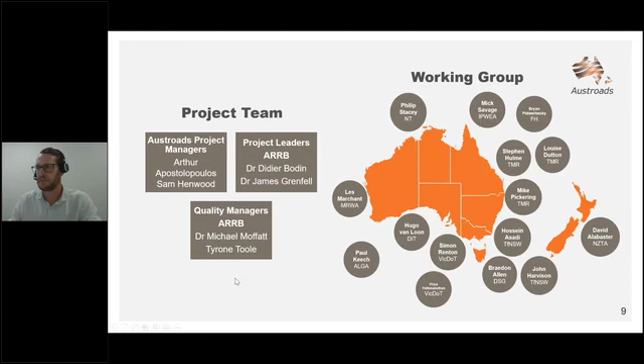So to put this in a bit of context, why do we need to look at glass? So in March 2020, COAG agreed the Australian government to regulate the export of glass and plastic and other recycled materials such as tyres and paper.

And the Transport and Infrastructure Council, TIC, noted the opportunity for transport infrastructure projects to repurpose some of this waste. So to support the COAG waste export ban and the National Waste Action Plan, Austroads commenced a programme of work to develop guidelines and specifications on the use of crushed glass in road construction by the end of 2021.

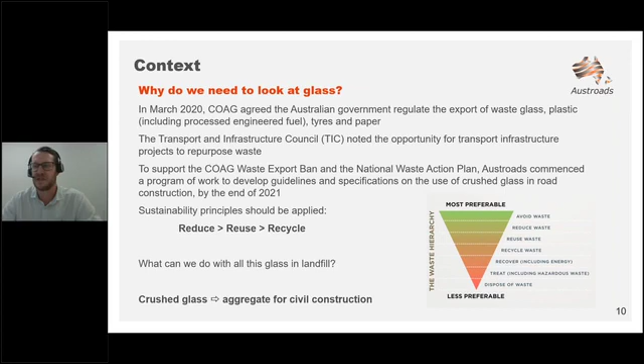As is the case with all projects, we should respect sustainability principles, and this involves reduction of the amount of waste that we're generating, reusing waste in its original intended use where possible, and where not possible, recycling the waste. So what can we do with all this glass that ends up in landfill? The purpose of this project is to look at whether we can use crushed glass as an aggregate for civil construction.

Now moving on to the project objective. The main project objectives are to increase the use of crushed glass in road infrastructure. This has been done through the development of an Austroads technical specification to assist road agencies and local governments to use more recycled materials in their road construction activities.

In support of this document, a technical report was also developed to give the underpinning knowledge on the limits and also the reasoning behind the technical specification. Also produced was a processing guidelines document.

This work was funded through an Infrastructure and Transport Senior Officials Committee project, and as mentioned by Katarina, sits as part of the Austroads Transport Infrastructure Programme under Ross Guppy.

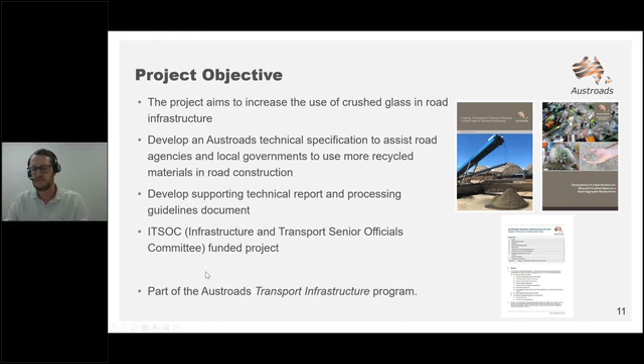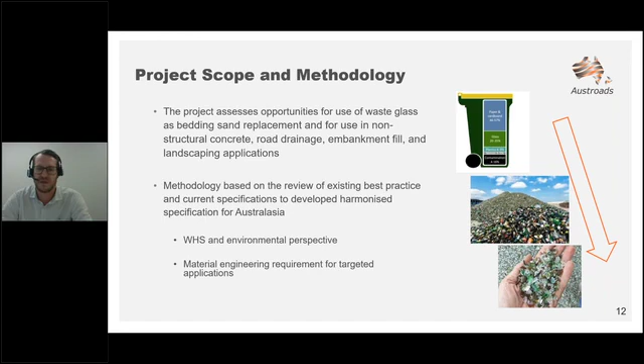Now to talk through the project scope and methodology. In terms of scope, the project assesses opportunities for the use of waste glass as a bedding sand replacement, and also for use in non-structural concrete and pavement applications, road drainage applications, embankment fill, and landscaping applications. The methodology involved reviewing existing best practice and current specifications to help develop a harmonized specification for Australasia. This work has taken into account work health and safety and environmental perspectives, and also considers the material engineering requirements for the targeted applications.

Dumping in earthworks potentially may have limited value, and we should be aiming at upcycling recycled resources where possible. Another note was that the economic benefit is very dependent on transport costs. There were question marks about certainty of supply, and that's something definitely to be thought about.

If we're using recycled crushed glass in a large number of projects, potentially we could end up using up all available stockpiles. Another thing that was noted was that the material can be more difficult to work with, especially in terms of things like odor, and it can be heavy when wet, and even more expensive when washed. We also need to be thinking about education for our engineers rather than mandating its use.

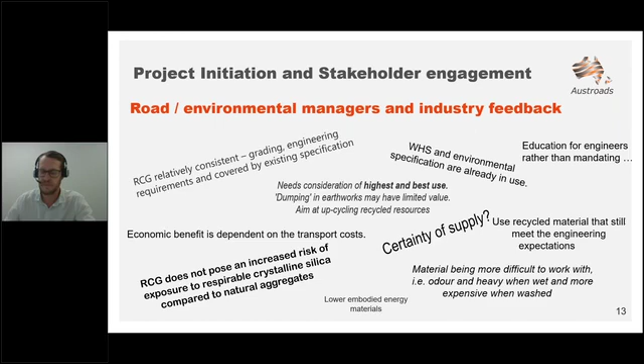I'm Didier Bodin, Principal Technology Leader at ARRB, and I will take you through the key findings of the technical report APT 362, which was published recently, which summarizes the technical basis of the development of the ATS 3050, which covers the supply of recycled crushed glass for transport infrastructure. I will present the important outcomes and put them in perspective of current practice. After that, James will be diving into more detail about the specification requirements.

As introduced earlier, the aggregate we are dealing with is derived from curbside recycling, commingled or separated, collection of glass. If they aren't recycled as glass containers, they can be recycled as aggregate, and for that they are crushed to produce a consistent grading material.

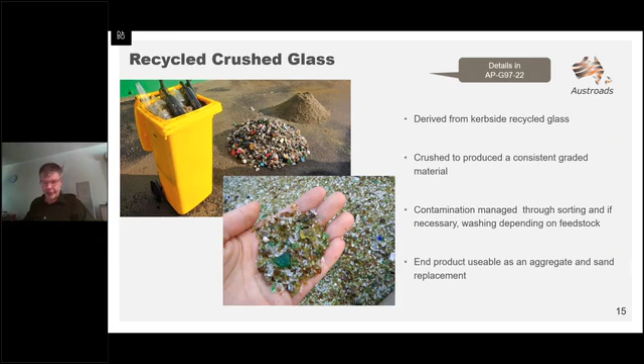The contamination level of this type of material can be managed through sorting and, if necessary, washing, depending on the feedstock and how uniform or contaminated it is. In general terms, the end product is usable as an aggregate or sand replacement in civil applications.

We went through an assessment of the environmental risks of using this type of aggregate in road infrastructure. It has a strong basis from past research and past regulation around the use of this material in this type of application. In particular, the EPA requirement set in 2014, which has been further adopted by TMR, Transport and Main Roads in Queensland, in the development of the MRTS 36, set the basis for us to harmonize the requirements for Australasia through this specification.

It basically contains three types of requirements.

The first set of requirements are on the metal contents, which include mercury, cadmium, lead, arsenic, chromium, copper, molybdenum, nickel and zinc. Also an assessment of the total organic carbon, an indication of organic matter contaminants, and an indirect assessment of any dissolved minerals which can be contaminating the aggregate through electrical conductivity.

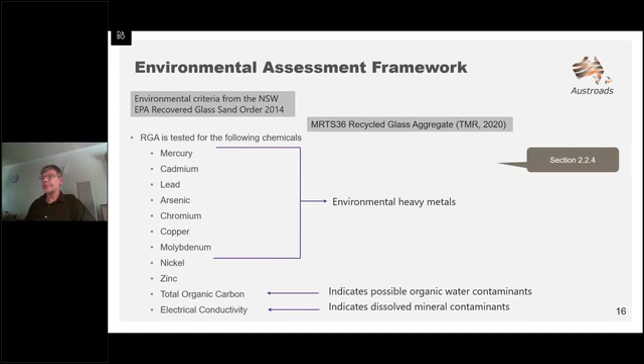So the methodology was based on benchmarking the current requirements through different agencies, from EPAs or other agencies, to set the limits which would be adopted nationally, including New Zealand, for the recycled crushed glass.

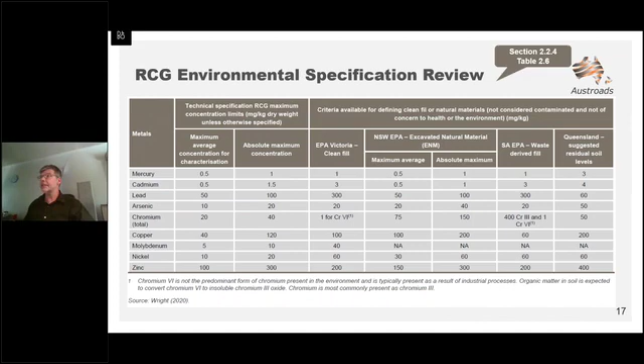As I said, the requirements set by the New South Wales EPA were key in setting this limit. They were the most stringent in most of the cases, and they basically included maximum average values and absolute maximum values, which shouldn't be measured on any sample from the stockpiles. Maximum averages are managed through sampling conditions detailed also in the specification.

It was important as well to summarize the current best practice with respect to work and safety risks and mitigation measures to protect the workers and more broadly the communities. Foundation work from the Winder report undertook a risk assessment and drafted an MSDS for recycled crushed glass for the transport infrastructure. This work was later supplemented by other studies.

An important aspect is that recycled crushed glass, unlike pure silica, doesn't pose an increased risk of exposure to respirable crystalline silica, because the glass from waste containers and bottles, etc., is made mostly from amorphous silica, which doesn't present the same harm and the same risk with respect to silicosis.

As with any aggregate, the risk of abrasion by direct contact is manageable through the use of standard PPEs, goggles, gloves, wearing long sleeves, etc.

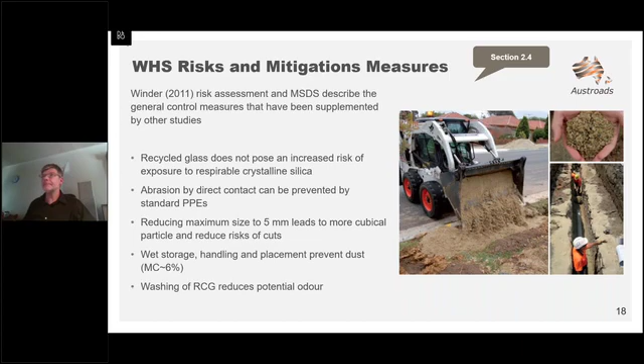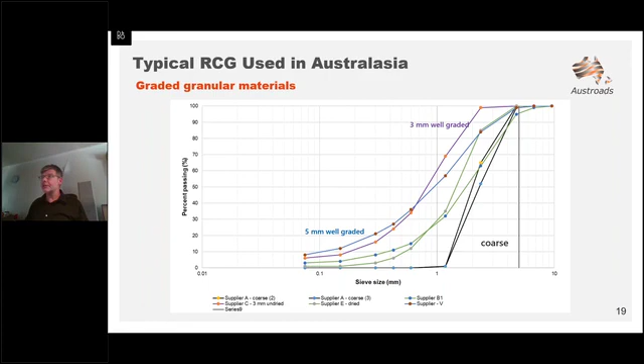Now we'll have a look at what the technical requirements are found to be. So we undertook a review of national and international practice, and it's not new technology, and we summarize the main characteristics, physical properties, which can be found in the literature in terms of particle size distribution, shape, and bearing capacity.

The plasticity of the material - for recycled crushed glass is a particularly non-plastic material, because if it's not contaminated, it has no plastic fines in it.

We summarize data available in terms of compactability, permeability, bearing capacity, and also typical values found for electrical conductivity. We have mentioned before that it can be varying, and it can also be a measure of mineral content. For electric applications as well, which was a bit beyond the scope of this project, the thermal conductivity can be an important factor to dissipate the heat from the electrical conduit.

But it's definitely out of the scope of this specification for high tension, high voltage applications, and some specific specifications for most grids, for instance, ban the use for high voltage electric lines, buried electric lines. In summary, we found that compacted RCG had comparable properties to natural sand products, and there was no reason, as demonstrated by a number of trials, not to use it as a replacement for sand or incorporated in any granular materials.

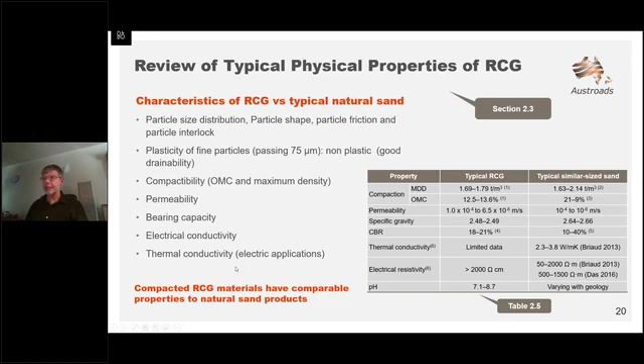What really matters when we are talking about a 100% recycled crushed glass product is the bearing capacity of the material, or its stability with time. This is mostly obtained through its grading, the particle size distribution, and how the material will reach maximum density. It's generally achieved with a well-graded material, which has the highest density result.

That has been used, and it's the typical grading we have, for instance, in the requirements of the specification for recycled crushed glass used as a bedding sand.

However, when it comes to drainage application, there's another function we're after with these materials. We are targeting more space between the particles to let the water flow, and not to build up suction too much through the aggregate packing. Therefore, in that instance, we will be targeting some gap-graded or single-size type of grading curves for drainage application.

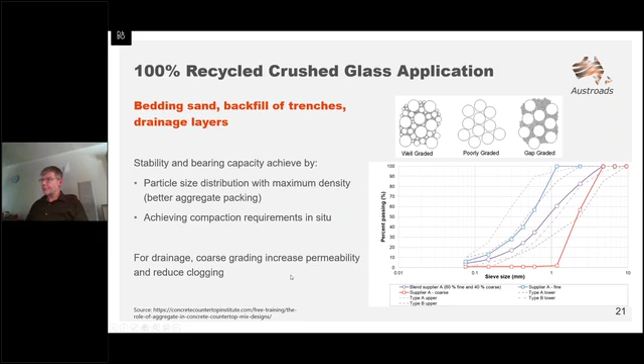Just to mention that some products I showed earlier don't necessarily meet the requirements of continuously graded material, but it's easy to recombine them. For instance, we have a coarse product and one passing 3 mil, two different products with a 40-60% blend. You end up with a product which is a well-graded material, so it can be tuned to the desired target gradings.

But also, recycled crushed glass can be used not only at 100%, but it can be added to a range of granular materials, primarily crushed rock, for road bases and road subbase. The specification in different jurisdictions varies from a 5 to 50% allowance, depending on the material type or the performance requirements in terms of traffic loading, or if it's a highly stressed layer.

It can be used as well as a constituent in concrete mixtures, and the scope of this work was mostly focused on non-structural concrete or concrete pavement. It can also be an additive in asphalt mixtures. It becomes part of the mix design, and there are some maximum requirements which can help manage potential risk of stripping.

And it's totally suitable, of course, to be added in terms of earthworks, embankment, and landscape application. But we have to bear in mind that we want to maximize and upcycle the use of this material, and it might not be the best end use of this material.

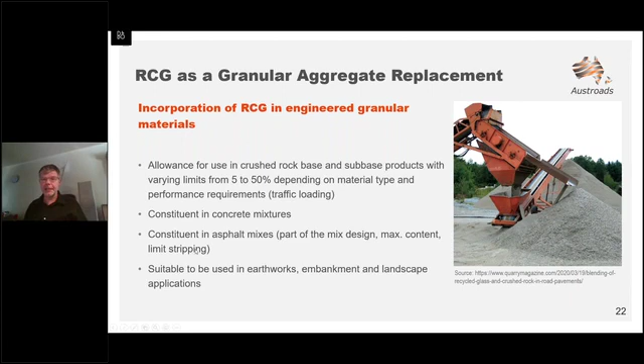And now I'm going to be moving on to talk about the Austroads technical specification. So this has obviously been developed as part of the project.

Just to go into an introduction to the development of the specification, this has been supported by decades of research, and field trials and implementation have paved the way. This dates back to things like the Packaging Stewardship Forum initiatives back in 2006, specifications for recycled crushed glass as an engineering material developed by Bob Andrews back in 2010, and trials of recycled glass as a pipe embedment material undertaken by the Department of Environment and Climate Change back in 2007.

As Didier mentioned before, the Department of Transport and Main Roads Queensland's MRTS 36 specification has been instrumental in the development of the specification. And also, obviously, we've been looking at what's been done overseas. So when glass hasn't been reused, i.e. converted back into glass containers, similar technical uses have been found overseas. Specifications for natural aggregates tend to set the minimum requirement for recycled crushed glass when used as a glass sand, and this has led to the development of a harmonized requirement for recycled crushed glass.

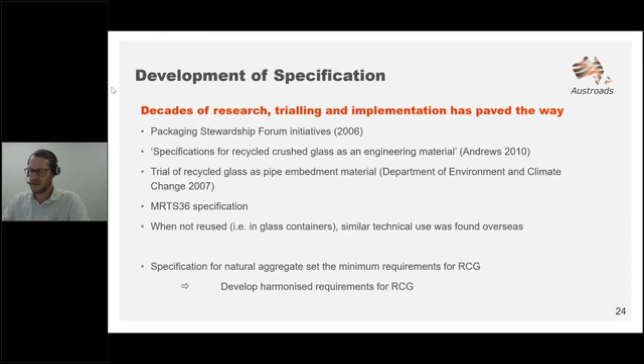Now I'm just going to talk through the structure of the developed specification. In terms of contents, it contains some information about the scope where the specification is applicable, provides a number of definitions of key phrases within the specification, goes on to list a number of reference documents, and then talks about the quality system requirements before going into some of the key aspects.

So the key aspects are things like the glass source, the chemical and other material requirements, its properties for use when used as a granular material, and then some of its properties when used in concrete, including some general requirements, and then it touches on the alkali silica reactivity.

Finally, there's some information about testing and conformance, so how often materials need to be tested, and what amounts or lots are needed to be tested to meet that conformance. And then it goes into some annexes that cover hold points and witness points and records.

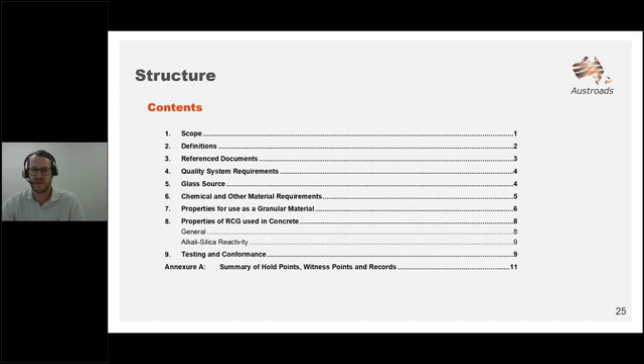So first of all, if we talk about the glass source, there's some key requirements in terms of the sources of recycled crushed glass and the contamination limits. Recycled crushed glass must be produced from food and beverage container glass or window glass, meaning the source material must be essentially free from glass from certain sources, including cathode ray tubes, fluorescent and incandescent lights, glass recovered from electrical equipment, glass recovered from laboratory sources, porcelain products and cook tops, and glass from hazardous waste containers.

This is one of the reasons to reduce the amount of contamination that could be in the resultant recycled crushed glass. Recycled crushed glass should be free from contaminants, and some maximum average concentrations are reported in Table 5.3, shown on the right-hand side of this slide.

There are limits for certain contaminants including metal and ceramics, with average maximum concentrations of 0.25% for metal and ceramics, with an absolute maximum concentration of 0.5% in any particular measured sample. This is similar for brick, plaster, clay lumps, and other friable materials. There's also a set of limits for contaminants such as rubber, plastic, bitumen, paper, cloth, paint, cork, wood, organic matter, and other deleterious materials, with a maximum allowable average concentration of 0.3% or an absolute maximum concentration of 0.5%.

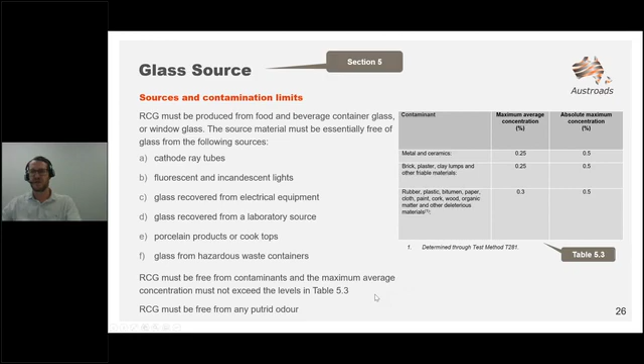These contaminants can be measured through Transport for New South Wales test method T281, which is a loss on ignition test. Also, the recycled crushed glass must be free from any putrid odor.

Now moving on to chemical and other material requirements. This is reiterating some of the information that Didier talked about from the technical report. In the specification, there are limits on chemical concentrations of certain metal contents, including mercury, cadmium, lead, arsenic, chromium, copper, molybdenum, nickel, and zinc, with maximum average concentration limits across a set of samples, typically 5 historic samples over time, but with some absolute maximum concentrations for any singular test.

There are also some limits on the total organic compound, organic carbon content, looking at organic water contaminants. There are also requirements in terms of electrical conductivity, which relates back to contamination levels of dissolved minerals. This table is within the specification and needs to be followed to understand what the chemical and other material requirements are.

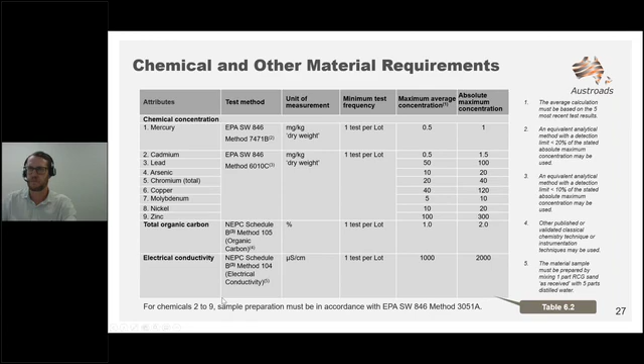The next thing is the properties for recycled crushed glass for use in granular materials, and there are quite specific grading requirements. Didier went through the background in the technical report as to why gradation is important for some applications. There are also some general notes about the recycled crushed glass particles - they should be cubic in shape and free from sharp edges and elongated particles. Their particle size distribution should be determined in accordance with AS 1141.11.1, but depending on the end application, each potential application has been designated a grading classification type.

As part of this work, we looked at a number of different end applications for recycled crushed glass, including bedding and haunch of drainage pipes and conduits and services, and also side zone and backfill of drainage trenches, which requires a Type A grading. It could also be used in bedding for segmental or block paving, requiring a Type B grading. It can also be used in joint filling, filling voids between individual segmental blocks or block pavers, requiring a slightly finer Type C grading.

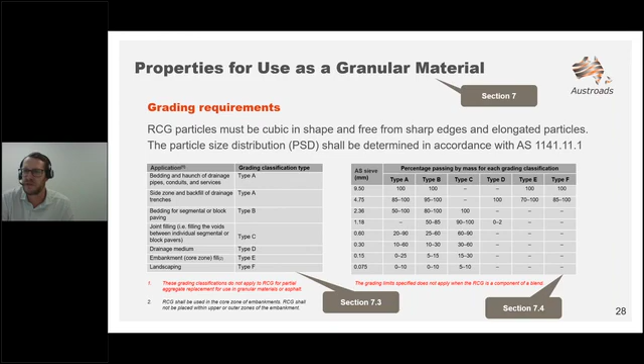Type D, which is for drainage medium, is controlling the glass particle size in terms of almost making a single-sized product, so still passing 4.75 millimeters, but pretty much everything retained on a 1.18 millimeter sieve to remove all the fines to allow it to be free draining. And there's much lower restrictions in terms of embankment fill and landscaping applications.

There are also a number of properties when recycled crushed glass is to be used in concrete, and these are very specific. A lot of this is to do with preventing certain deleterious reactions that can occur with certain contaminants when recycled crushed glass or specific aggregates are incorporated into concrete.

So things that we need to be mindful of are things like sugar in the aggregate, sulfate content, chloride content. There's also some requirements for methylene blue absorption values, which relates to clay content.

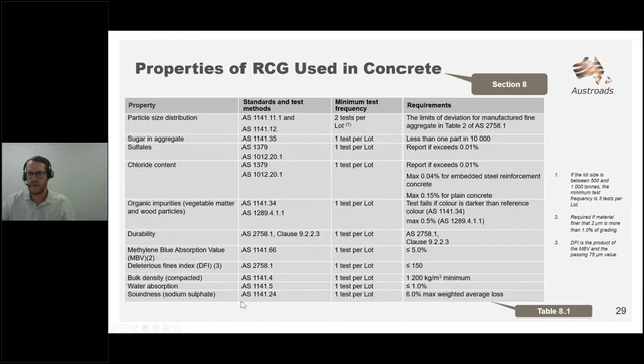As mentioned, the alkali-silica reactivity is a major challenge. We want to prevent that alkali-silica reaction from occurring in concrete when recycled crushed glass is used as a fine sand replacement. Alkali-silica reaction is known as concrete cancer and causes silica to react with the alkali in the concrete. This can create microcracking within the resultant concrete, leading to strength losses.

So the alkali-silica reaction potential in concrete can be determined through the composition of the recycled crushed glass. RCG is identified as having a potential problem if it's tested in accordance with either AS1141.60.1 or AS1141.60.2, which are methods for sampling and testing aggregates' potential to alkali silica reactivity, either the accelerated mortar bar method or the concrete prism method.

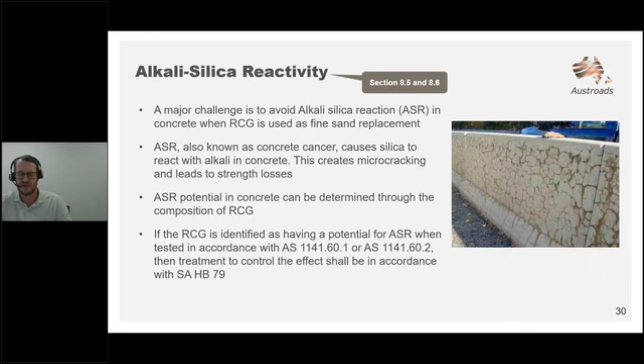And if the RCG is identified as having a potential ASR problem, there is also some advice out there for treatment control, and that treatment control should be carried out in accordance with SA HB 79, which is relating to alkali aggregate reaction, and guidelines on minimizing the risk of damage to concrete structures in Australia.

Now I'm just going to touch upon some of the contents of the guidelines document. We don't have too much time, so I won't go into too much detail. But essentially, the guidelines document provides some general information about how glass should be processed to meet the requirements of the RCG specification.

And if we consider processing of glass, we can be looking at fairly basic processes through to very complex processes. At the more basic level, we could just be including some primary crushing and then a certain amount of processing in terms of removing contaminants. But in more complex systems, we could end up with a number of crushing stages to meet very specific grading requirements, and it could also include some washing requirements, which can be more applicable to certain applications, as we'll touch on later.

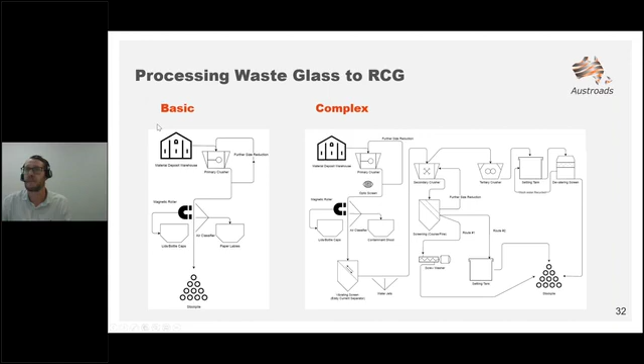So in terms of crushing, it can involve a number of steps, but typically we can meet the requirements with one step, and an impact crusher is potentially the best way to do this. It tends to produce a more uniform particle shape, which is generally cubical in nature.

It produces more fines, which can be advantageous for certain industries, especially hot asphalt producers. It can incorporate a number of interchangeable sieves, which allows us to have more control over the end particle gradation. And also, damaged hammers can be quickly replaced in this type of device.

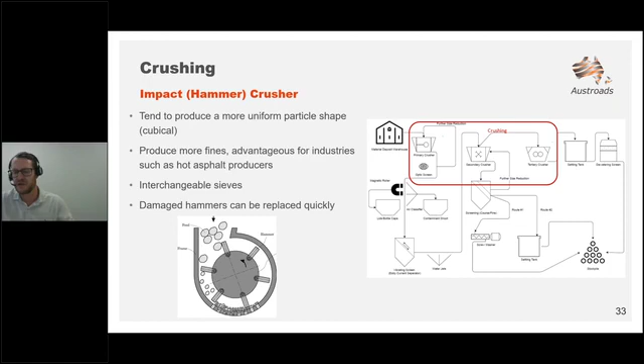So in terms of processing, again, there's a number of stages that are typically required. The first stage is optical sorting, and often this is undertaken manually to remove some significant pieces of contaminant. Then we'd often involve a magnetic belt sorter to remove ferrous or magnetic materials.

An air classifier is typically used to separate out materials of different densities, and this is particularly useful for separating out things like paper and labeling, things with much lower density than the glass. Eddy current separators can be used for separating out non-magnetic metals. So by the time the glass has gone through all of these different processes, it's normally relatively contaminant free.

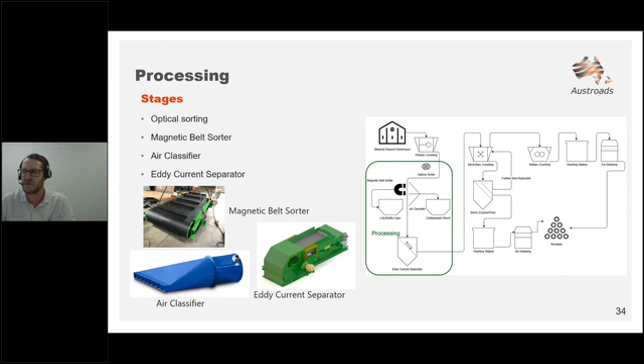But there is also that option to go through cleaning processes, dependent on the end application, that is of course optional. It's probably more suited for concrete applications where we're very concerned about the sugars content, for example, and some of the contaminants that might lead to alkali silica reactions. It can also be used to reduce odor, and so if odor has been identified as a particular problem for our recycled crushed glass, it can be reduced by putting it through a washing process. It could also be applicable for asphalt applications, especially if we're concerned about odor from asphalt plants.

Another concern for asphalt plants is the potential risk of fires if there's remaining paper left over from labeling, etc. But that should have been removed by the air classifier in the processing stage. So one thing about cleaning is obviously it increases costs, and therefore it can make our recycled crushed glass less sustainable to use.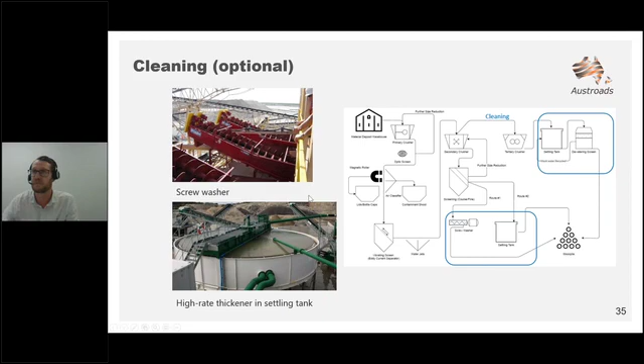So now I'm going to move on to some concluding remarks. The major outcomes from this project are the Austroads technical specification, ATS 3050, which sets the requirements for the safe supply and use of recycled crushed glass. There's also the supporting technical document and the guidelines for the processing of recycled crushed glass, which provides an overview of RCG production and some broad requirements and processing steps to reach the specification requirements. All of this work promotes the harmonized practice for the use of recycled crushed glass in transport infrastructure, and it's available now, so download it and start using it.

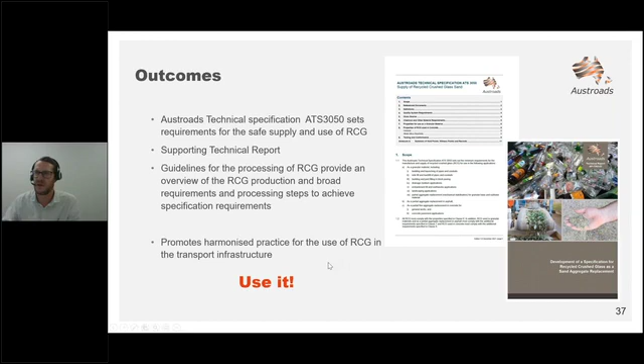Right, just a first question that we've received. Can you comment on the technical issues associated with recycled crushed glass usage in concrete? As I'm aware, it can be used in some applications, but not all. For example, structural concrete.

Might take this one. Thank you for asking this question. So as part of the scope of this work, our targeted applications were non-structural concrete and concrete pavement. Some research has taken place for investigating the use of recycled crushed glass in structural concrete, but it's not the purpose here. What we are more talking about is general concrete, non-structural for curb and channels, footpaths, shared paths, traffic islands with no traffic, footing for sign support, poles, lighting columns or traffic signals, which by nature have a low requirement, and the RCG in the specification is fit for purpose for this type of use.

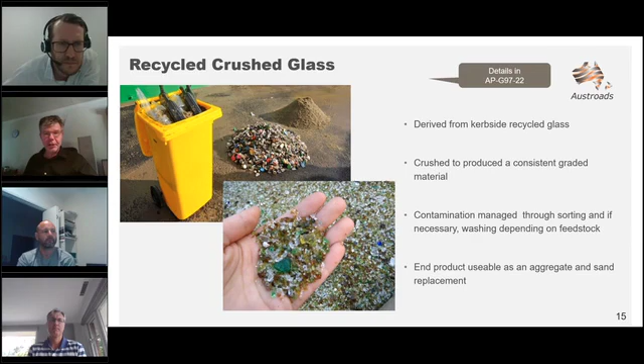Another question we had was, in a general sense, surface friction is pretty low in glass particles. Have you checked the packing characteristics and stress distribution of RCG layers, specifically in pavements? The project itself didn't include laboratory testing, so we rely on the test results from the literature, and when compared to natural sands, we found that even the shear strength parameters were comparable to natural sands. But again, depending on the petrographic nature of the natural sand, it varies in range. It was definitely found fit for purpose for the designated applications which are covered by the specification.

There was another question relating to particle interlock. Other research work that we've done has suggested that recycled crushed glass has a lower specific surface area than other aggregate types, so potentially that can mean reduced particle interlock. It also has potential implications for its use in asphalt, that due to that lower specific surface area, it could have some implications in terms of its resistance to moisture damage and stripping. Going back to moisture damage and stripping, the recycled crushed glass, if it was clean, should perform quite well in terms of its adhesion to bitumen. But the main reason why it might not be as good as certain other aggregates is more down to its lower specific surface area.

There was a question, can you elaborate on the use of RCG as landscaping? I understand the use for paving, but not clear on the intent of landscaping. Landscaping can be quite broad. The objective here is not to ban its use in landscaping application, and it's to make best use if that's the only application for the recycled crushed glass in the area. It can be used as a sand replacement in landscaping applications, which are obviously non-structural, and takes the opportunity to use a recycled resource instead of extracting sand from the earth for more construction. So it's to be open-minded in terms of the range of applications, and it's up to the end user to select where the best use is.